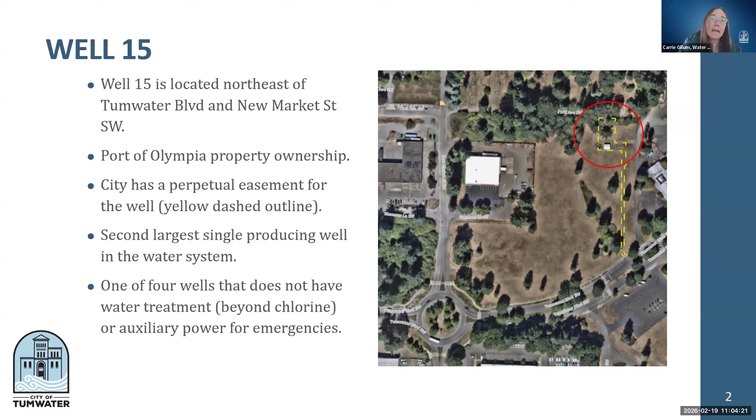It is our second largest single producing well in the water system. The other one is Well 14, which is in the Bush area, the Bush Middle School area. It is one of 4 wells as part of our Port well field that does not have any treatment beyond chlorine. It also does not have any auxiliary power, which our Palermo well field and our Bush well field both have, along with aeration treatment and backup power for emergencies.

So a little bit about the rule that's kind of guiding some of the work that needs to be done on this site. In 1991, EPA had the lead and copper rule that was passed, established by the Environmental Protection Agency, to reduce the exposure of lead and copper in drinking water to any customers that receive it. It set action levels for both those constituents, and if more than 10% of those samples were higher than that action level, systems would be required to make changes in order to reduce that.

So it's just more than anything that our water can potentially leach out from the pipes that it's delivered in, both on the distribution side, but also in the homes. Sometimes the quality or parameters that EPA is looking for doesn't quite fit the criteria, and therefore they require something called a corrosion control treatment, corrosion being the removal of metals from the pipes into the water. In order to make sure that we are fulfilling those requirements and not exceeding action levels, we do regular monitoring at the customer's tap, which accounts for both the distribution side and the customer side of the pipes.

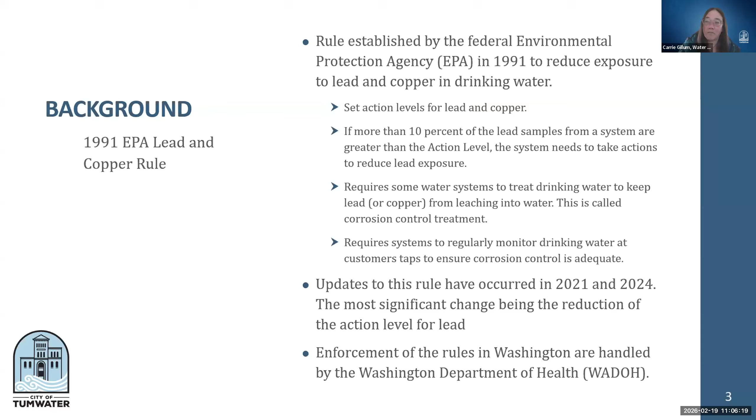So updates to the rule have occurred in 2021 and 2024, the most significant being the reduction in the lead action level. It actually went from 15 ppb to 10 ppb. All of the enforcement that comes from this has actually been given to the state, so we work with the Washington Department of Health to make sure that we are in compliance.

So a little bit of what our historical compliance with the lead and copper rule has been. In 1994, we did do a corrosion control study, but it didn't really focus on the drinking water and the chemistry of the water and how corrosion of the pipes could occur. It was more about soil pipe interface. This was adequate at that time and fulfilled the requirements for the 1991 start of the EPA rule.

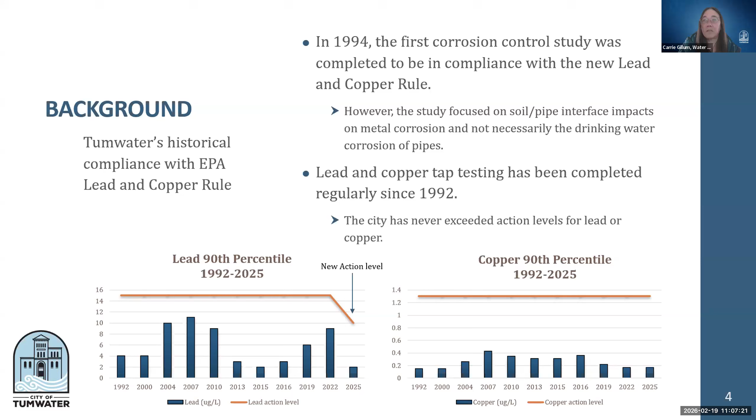We have also continued with lead and copper testing on a regular basis since 1992. As shown in these graphs, the red line is our action level. A new action level was introduced in 2025 for both lead and copper, but lead was the only one reduced. We've been in compliance since the start of the rule, as seen with all of our testing.

In 2019, we were notified by Washington Department of Health that we are now considered a large water system, over 50,000 people served. That includes both residents and people who visit our community. Because of that, we will be required to have proof of optimized corrosion control in our system.

This needed to be done through a study, so we hired HDR in 2021 to complete it. This required a lot of water quality sampling, as well as reviewing past sampling and research that we had done.

Carrie, I have a question for you. Is well number 15 the only well we're doing this for, or is this a line where we've done it to the other wells as well? For this one, we only need to do well 15.

However, the other wells in the Port Wellfield, which I'll talk about in the next few slides, are also going to need some type of treatment according to DOH. We're also trying to determine what we want to do with those wells, whether to continue using them, put in new wells, or set up connections or separate treatment systems. But for now, because this is the second largest volume well we use, DOH wants us to proceed with this one.

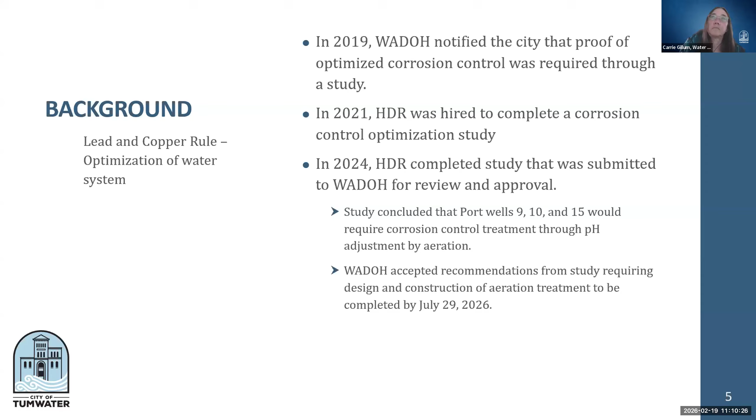The facility design has been selected to be done by Gray and Osborne, which is the reason for the agreement in front of us. It will include the aeration treatment design, but we're also looking to replace the old wooden structure with something more earthquake resilient and generally safer. Many of our other structures are block structures, which would also help with security.

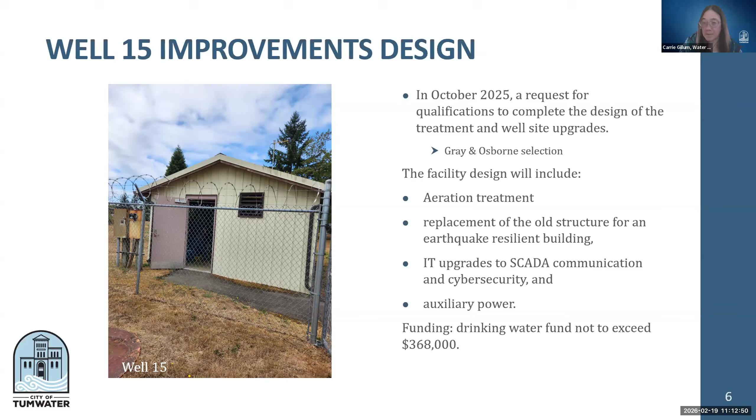So my recommendation is to place the service provider agreement with Gray and Osborne for the Well 15 aeration design project on the March 3rd, 2026 City Council consent calendar with a recommendation to approve and authorize the mayor to sign. Fellow council members, any questions for Carrie? Thank you, Carrie. No questions from me.

I do have a few. So again, remind us, after the design part, when do we foresee it going into construction? It looks like design is going to take about 12 to 18 months, and we're hoping that construction will follow immediately afterwards.

I will be in touch with DOH about any extensions that are needed, and they also understand that may be necessary and didn't see an issue at the time. Okay, because I was thinking that too, because there was a deadline there, so we'll probably be seeing this again.

Okay, and then the whole thing, like the copper and lead part, when that is a triggering thing, it's really a pH thing. It's not that we have an issue with the quality of our water because we're constantly testing it. So is that correct, want to reconfirm? Yeah, we have had no issues with lead and copper as a system as a whole.

There have been some sites, like some homes, that maybe test high, and what we've determined is usually they have fittings and stuff that are pre-ban in their homes still, that have maybe a higher lead level. Copper we have not exceeded, so we've been safe there. And then we have worked with those individuals to inform them of what they need to do.

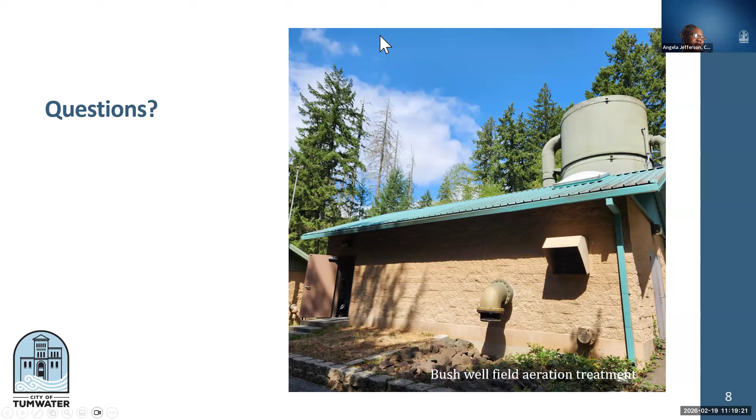With that said, we have a motion to place a service provider agreement with Gray and Osborne for the Well 15 aeration design project on the March 3rd, 2026 City Council consent calendar, with a recommendation to approve and authorize the mayor to sign. So moved. Second. All in favor, say aye. Aye. Aye. Aye. Motion passes.

Next on our agenda is the final acceptance of work with A&D Enterprises for the Anson Sewer Project.

Good morning council, I guess afternoon now—not used to being in the afternoon. So afternoon, council members. Hopefully everybody can see my screen. Perfect, okay, go ahead and get started. I'm Colby Fletcher, the city construction manager who deals with all the capital construction contracts. Again, we're meeting here today. I'm here to present the final acceptance of work with A&D Enterprises for the Anson Sewer project, so I'll go ahead and get started.

I'll give a brief project overview. This project fits with the City of Tumwater's vision, mission, and beliefs, strengthening our commitment to the city's strategic priority goals, more specifically being a leader in environmental sustainability by increasing the capacity of the public sewer system. The scope of work included upgrading the Anson Street sewer force main, ensuring capacity for a growing population, and decommissioning a non-serviceable lift station at Lake Park.

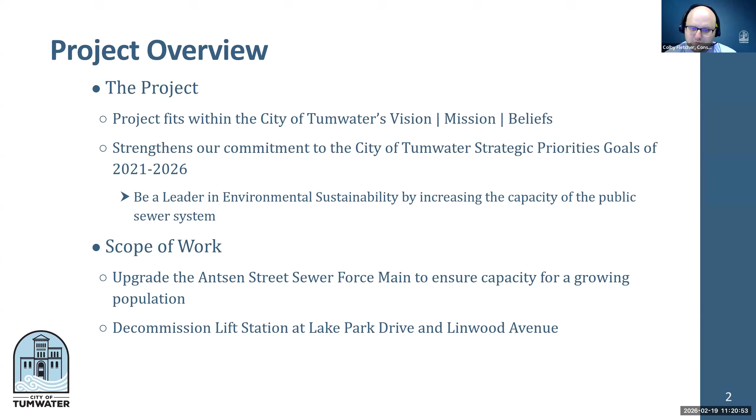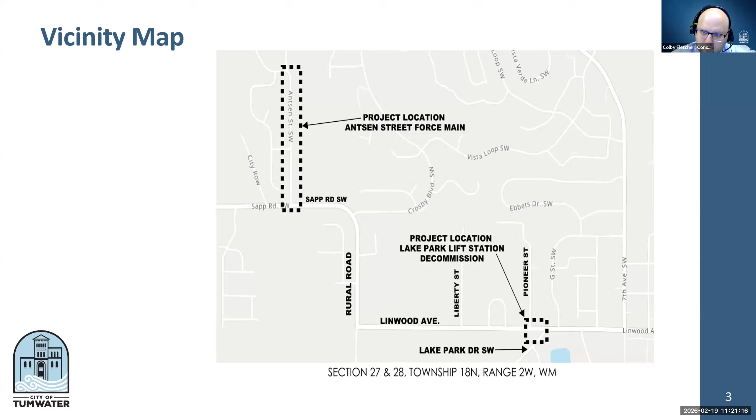Now I'll go into what we accomplished. The improvements included installation of 1,425 feet of 6-inch force main on Antsen Street. This separated two lift stations that were once served by a single force main—the Streamland lift station and the Suncrest lift station—so they now operate on two separate, independent force mains. They combine at the north end of the project into an existing manhole and flow into a gravity sewer system ultimately. We also decommissioned the old lift station at Lake Park Drive and Linwood Avenue. The benefits include improved force main performance, a safer and more efficient sewer system, and increased pumping capacity for the Streamland and Suncrest lift stations.

And then the pump station decommissioning, as I mentioned, was an old, kind of abandoned but still operational lift station. It allowed us to remove the unused pump station hardware, increase safety because it was a roadside hazard, and also remove an active PSE power meter and control panel.

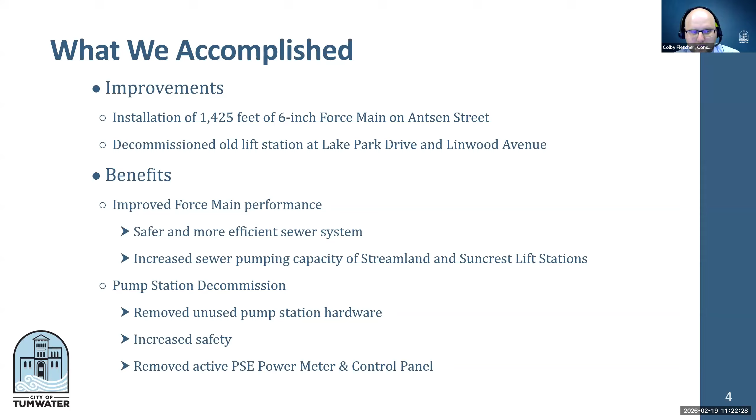Showcasing some photos of the sewer force main installations here on Antsen Street. The one picture on the left is some of the trench excavation. There was a plethora of existing underground utilities we had to navigate - that seems pretty common here in the city of Tumwater. So we had everything located and they were able to plan for that. And over to the right is the actual installation of the new 6-inch force main on Antsen Street itself.

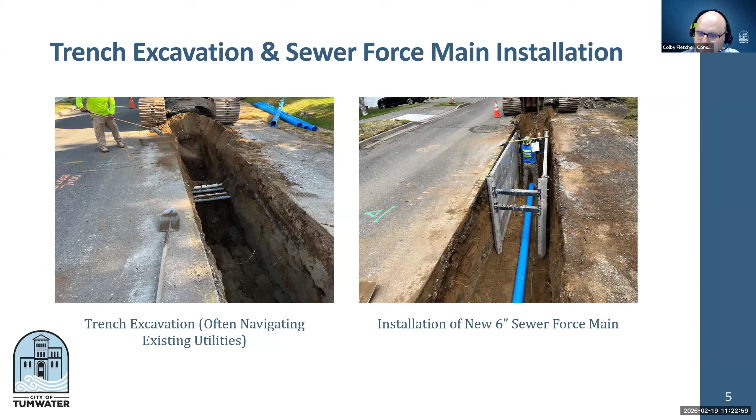Getting into the construction summary for this project. We started this project on May 28th, 2025. We achieved substantial completion on June 19th and physical completion on June 23rd. The funding came from sewer CFPs, and the engineering cost estimate was $376,000. Bids came in much lower than that, which we were really happy to see. The actual low bid was awarded to A&D Enterprises at $321,000, and the final contract total was $305,000 after all construction was complete.

Overall, this project was a huge success. Sewer systems are operating way more efficiently now - there was strain on the lift stations competing with the shared force main. We did a lot of outreach with this project too, to the HOA. We had them involved heavily through the pre-con and getting all the communications outreach done, so everybody was well aware of the project and what was coming. There were some on-street parking limitations we had to coordinate, but there wasn't any issues with that - everybody was pretty accommodating. I think they appreciated all the outreach we did in advance.

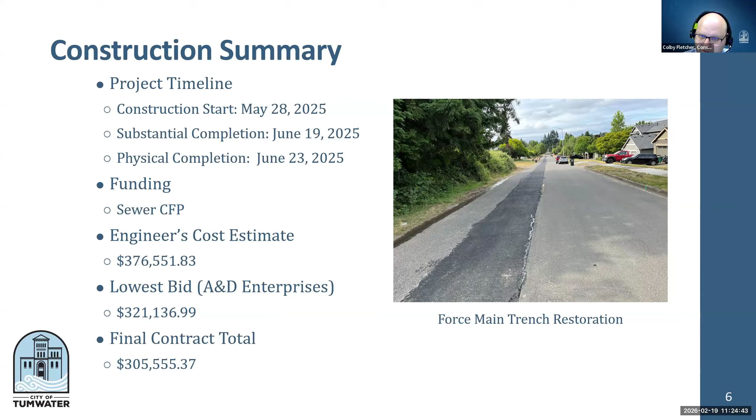So I'll open it up to any questions. Okay, Colby. So I have a question - it's a process because I don't understand the process.

So we're going to release the performance bond because they posted the bond before they started the work, and work is complete. Talk me through that - explain that to me. As part of all the construction administration aspects, there are two options for contractors to onboard with the city: either to bond or do retainage. On this project, it was bonding, and that's all the releases and stuff.

So in order to get bond releases, and when it says the state of Washington will allow, there are three agencies we have to get clearances from once a project is ready for closeout - the Department of Revenue, I think the Employment Security Department, and I forget the third one off the top of my head. If Dina were here, she'd be able to help me answer that. But there are three clearances we have to get, and once we achieve all those clearances from those state agencies, we can go through and release all the bonding and retainage.

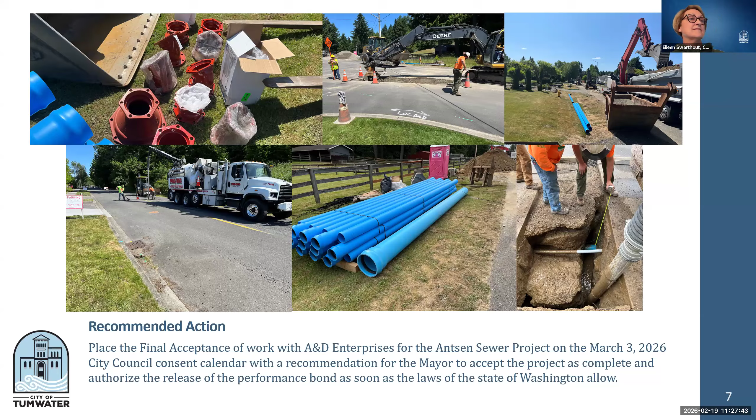I move that we place the final acceptance of work with A&D Enterprises for the Antsen Sewer Project on the March 3 City Council consent calendar, with a recommendation for the mayor to accept the project as complete and authorize the release of the performance bond as soon as the state of Washington laws allow. I'll second. All in favor, say aye. Aye. Motion passes.

Next is the final acceptance of work with Miles Resources for the Israel Road pedestrian and bike project. That would be me again for this one. So, Colby, will you be for the next one also?

No, I will not. So, just two for me today. You will see me forthcoming on some additional public works committees here in the immediate future, though, for some additional final acceptance of works. But I limited it to two for myself today.

So, as you mentioned, here to present on the final acceptance of work with Miles Resources for the Israel Road Pedestrian and Bicycle Improvements Project. So kind of go over the brief project overview again with this one. This one fits with our Tumwater vision, beliefs, mission, strengthening the commitment to strategic priorities and goals. Specifically, this was creating and maintaining a transportation system safe for all modes of travel.

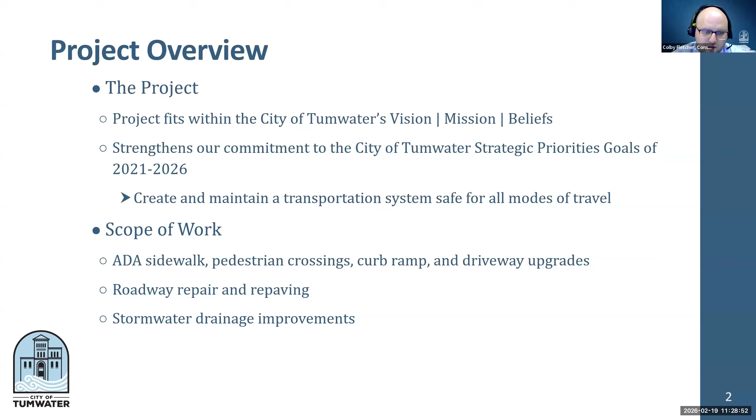Scope of work on this project was pretty heavy-handed. We did a lot of ADA sidewalk improvements, some pedestrian crossing improvements, curb ramps, driveway upgrades. We did roadway repair and repaving and some stormwater drainage improvements. So let's get to the vicinity map so you all can see kind of where that's at.

Obviously, it was right here in front of City Hall. This project was a part of, I guess, basically the after treatment of our Israel Road water main project, which we did in, I think it was 2023. So this was kind of the restoration of the roadway and stuff for that.

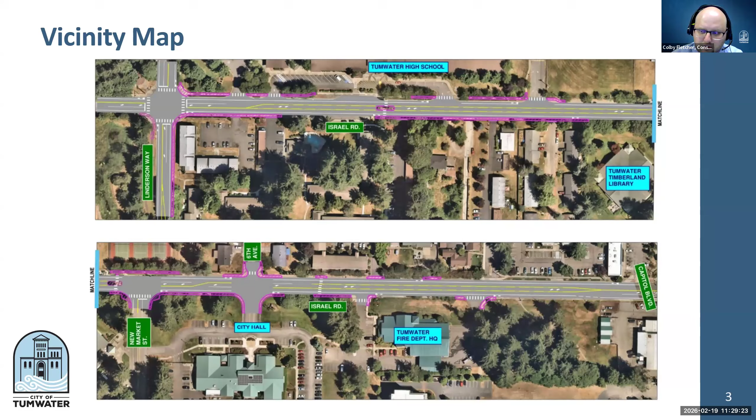As you can see, everything in magenta is kind of all the sidewalk improvements. Everything in gray is the limits of our paving, restriping, and that.

I guess with this project, throwing up the numbers here for what we accomplished: pedestrian and bicycle safety improvements. We had 3,500 lineal feet of reconstructed sidewalks. We had some substandard sidewalk widths and increased those to ADA compliant widths. We had 30 reconstructed curb ramps - a lot of those don't have domes and didn't meet ADA compliance grades, so we reconstructed those to meet ADA.

We had 16 improved pedestrian crossings, so that includes the longitudinal crossings, like the crossing in front of the high school. All those crossings got reconfigured, and we also enhanced the existing crossing across Israel Road by installing an RRFB, a pedestrian signal there in front of New Market Street. That was previously a flagged condition, and this one actually has the press button, alerting motorists of pedestrian traffic.

We also improved bicycle facilities on this. The pre-existing condition of the roadway didn't have standard lane width, so we did an ultimate road diet on this one where we provided 6-foot bike lanes, shrunk the lanes to 10 feet for traffic calming, and reduced the two-way left turn lane a bit too, so we could get those widths on the bike lanes.

Ultimate roadway improvements: we did 29,000 square feet of roadway repaving, so I'm sure everybody was aware driving Israel Road when we had it stripped down and planed - it was a bit of a challenge, but we were able to get it repaved the same week. We did 3,370 lineal feet of new curb. There were some spot repairs to storm drainage conveyance, and ultimately the pavement markings and some permanent signage were installed as well.

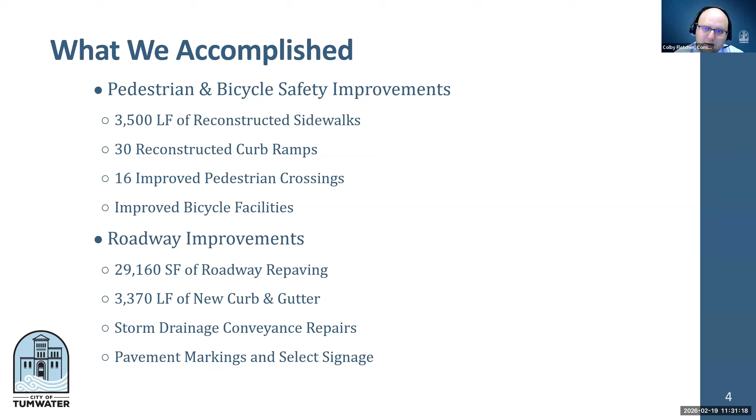So here's a quick look through some photos. On the left there is curb and gutter construction. They're using a slip form machine, which is a more streamlined and efficient operation instead of hand forming a lot of stuff when doing lengthy straight lines of curb and gutter construction.

And then on the right side, yeah. Colby, I have a question for you. So when Miles Resources is doing that work, is there someone from our organization who goes out there to inspect it every day? Are they out there with them? Tell me about that.

Yeah, absolutely. We do have inspectors, city inspection staff, out there on site monitoring compliance. This one had federal aid funding, so there's a lot of contract administration documents we need to document throughout the process, including DBE performance since we had some DBE subcontractors on this project. They're confirming our plans, because we put together a plan set and spec package, and the inspector's job is to verify that they're conforming to those requirements.

There's certain ways construction is supposed to occur. There's the standard specifications for WSDOT, which we adopt as well - I call it the roadway construction Bible, a thick book with all aspects of roadway construction in it and requirements they're supposed to be verifying. We also hire independent materials testing consultants to make sure things like concrete and asphalt are compliant with contract requirements - gradation, concrete, air, all this other stuff.

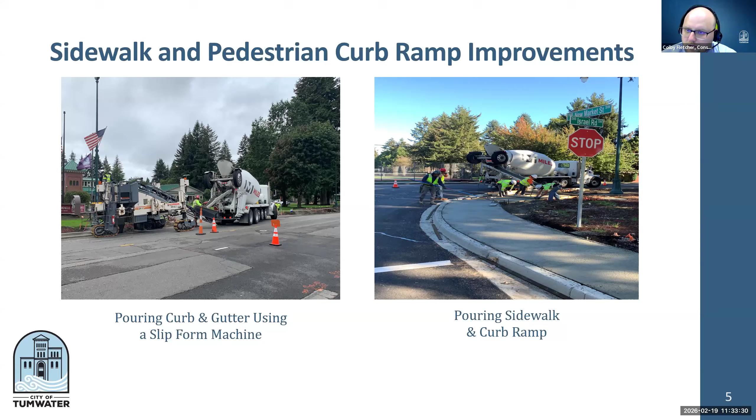Next page, some more roadway improvement photos. On the left there's a stormwater catch basin install. We had to do some spot repairs for drainage. Israel Road is an extremely flat road, so trying to mitigate stormwater and get it to flow where it needs to is challenging in and of itself. We were able to identify all those needs before construction and had those items addressed where we'd seen ponding previously prior to paving. The right picture is the night paving operation.

We did get council approval on this one for night paving and detours. We know it's a residential street, and we do have that liberty for construction projects to do that. There was a heavy-handed effort again with public outreach, letting people know in advance of the night work and when it would be occurring. Ultimately it was 7 total nights of night work, with the loudest operation being the grinding operation. So we ground everything out, and then we went through and paved it.

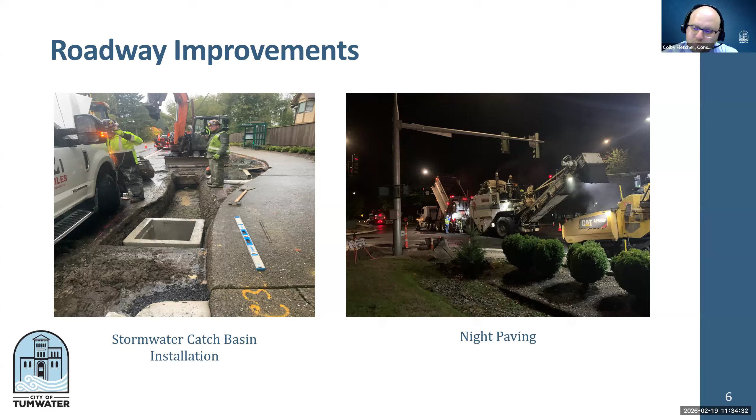Getting to the construction summary, project timeline - this one started August 12th, 2024. We finally achieved substantial completion June 27th of 2025. That was due to the long lead procurement of the RRFB, the pedestrian signal. Electrical materials are notoriously long lead items, like 6 to 9 months for procuring some of those things, just due to a limited number of fabricators around the US.

We achieved physical completion on October 1st. That included the plant establishment period, so we couldn't issue physical completion until those periods were observed. As mentioned previously, we did have federal funding participation on this - there was 903,000 offered, plus some local funding matches from the transportation CFP and the TBD. I didn't get those exact values on here, but the engineering cost estimate originally was 1,832,000.

The lowest bid was a little higher than we anticipated due to bid prices of HMA. I think the leading cause of that is hot mix asphalt being a pretty volatile cost with fuel prices and stuff - we saw that when we bid this. But Miles Resources was awarded the contract at 1,963,000, and our final contract total was just slightly above budget at 2,000,000 or so, 2,004,000.

The reasoning primarily for that was the repaving aspect. We knew the condition - you can kind of see the photos on the right there, the before and after. The conditions of Israel Road were pretty substantial, and we weren't sure what that was going to look like after we ground out the roadway surface, because that's typically when we do our spot repairs for asphalt to address issues under the pavement.

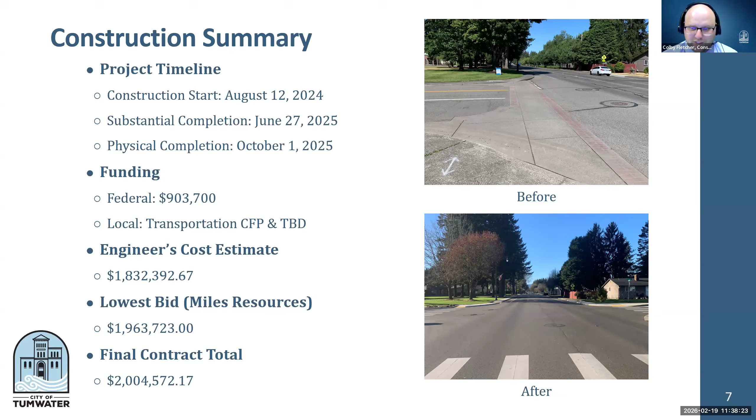Great work, Colby. Thank you. Any other questions? Sorry about that, didn't mean to cut you off. Sorry, Colby, go ahead. No, you're okay.

I was just going to read the recommended action and then showcase this photo here as well. This is of the new pedestrian crossing we put in at New Market Street, right across from the library.

The recommended action for this is to place the final acceptance of work with Miles Resources for the Israel Pedestrian and Bike Project on the March 3rd, 2026 city consent calendar, with the recommendation for the mayor to accept the project as complete and authorize the release of the performance bond as soon as the laws of the state of Washington allow. So with that, I'll open it up to any questions.

No questions for me. No questions. Great job, thank you.

My only question is, I've already said something to city administrators, if we could have flashing lights on our 25 miles per hour signs to say yes, it's 25, and then the next sign too, because I don't know how many we have along there, that yes it's still 25, because nobody does 25 on that road. So that's my pet peeve. And I was counting them on Trosper as well the other day as I was leaving the grocery store, that we have at least 4 when you leave, but by the time I turned on Rural Road, there's at least 4 25-mile-an-hour signs there. Anyway, that's just my pet peeve, throwing it out there.

Yeah, and as I alluded to, the reduction down to 10 foot lanes presents a traffic calming measure, it just restricts it. Sure, there's the occasional speeder though, absolutely. Oh yeah, occasional, okay. Colby, you're giving some grace there. Just occasional, yeah, yep, okay.

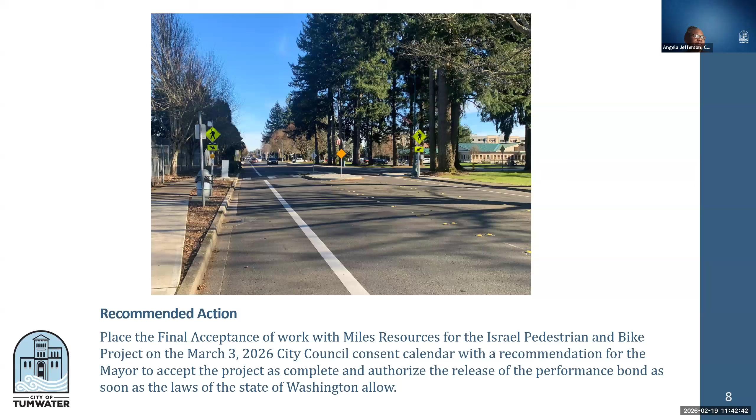Yeah, I was gonna just recommend that Colby just do this one as well, he's doing such a good job. Let me make sure I can get this thing. Sorry, I'm getting used to Zoom here. Do you see my screen?

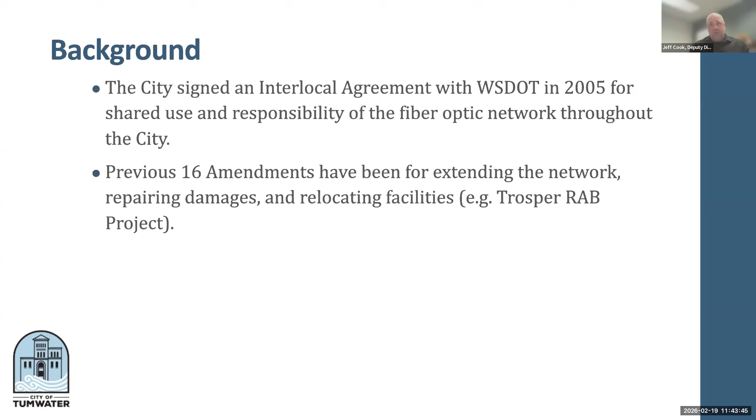Yes. Okay, mine is not nearly as dramatic or impactful, but it is important. This is about an interlocal agreement we have with WSDOT, and we have had it since it began back in 2005. In case I misspeak on anything, Lance is here to correct me. In 2005, the city signed an interlocal agreement with WSDOT to share responsibility for a fiber optic network as far as city operations, EMS, fire, IT throughout, goes to the golf course—it's throughout the city network. There have been 16 amendments to this agreement in the last 20 years that extend the network and pay for repairing damages or relocating facilities and that sort of thing. So this has been a long-standing partnership and it's been a productive one with WSDOT. It's a good balance of sharing resources with another agency.

This amendment simply extends the end date. It's set to expire, and this extends the end date to the calendar year 2045 to continue to do business the way we have for the last 20 years in partnership with WSDOT, and all the conditions of the original agreement and previous amendments still apply. So I could try and do a puppet show or something, but I think it's a pretty straightforward administrative change. Lance, unless you wanted to add anything else to that—I don't want to put you on the spot.

But hearing nothing, the request is to place the fiber optic cabling agreement with WSDOT on the March 3rd consent calendar with a recommendation for the mayor to authorize and sign. Again, this basically just extends the end date to an agreement we've had in place for the last 20 years. Any questions for Mr. Cook?

No. No questions for you, Mr. Cook. You did a wonderful job.

With that, we have a motion to place the fiber optic cabling agreement with the Washington State Department of Transportation on the March 3rd, 2026 City Council consent calendar with a recommendation to approve and authorize the mayor to sign. So moved. Second. All in favor, say aye.